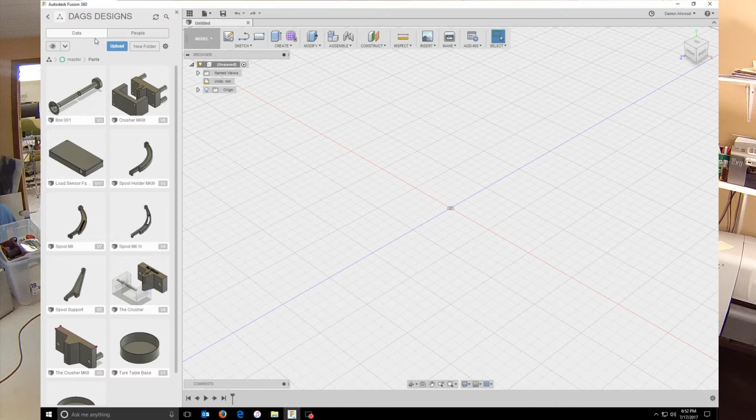These are just a bunch of different parts. So, this just gives you an idea of the different things I'm doing. Here's the C130 parts I've made so far, and I'm actually going to open up this.

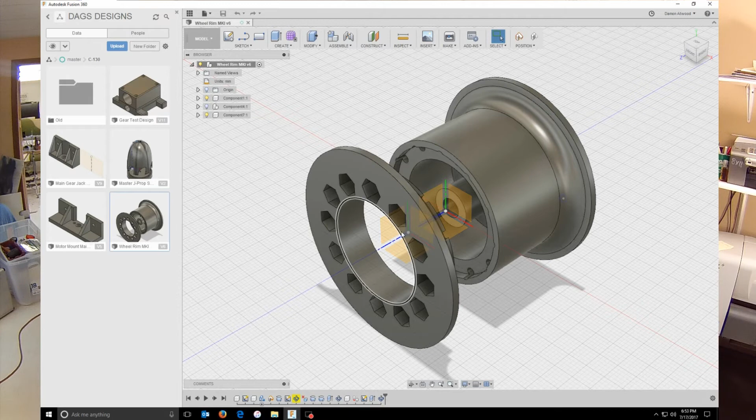And this is me playing around with a tire, the rim I'm going to try to make for the C130 using the carbon impregnated nylon. I think it's going to be strong enough, but the really nice thing about this program is just the editability, if that's a word, my ability to go in and edit things.

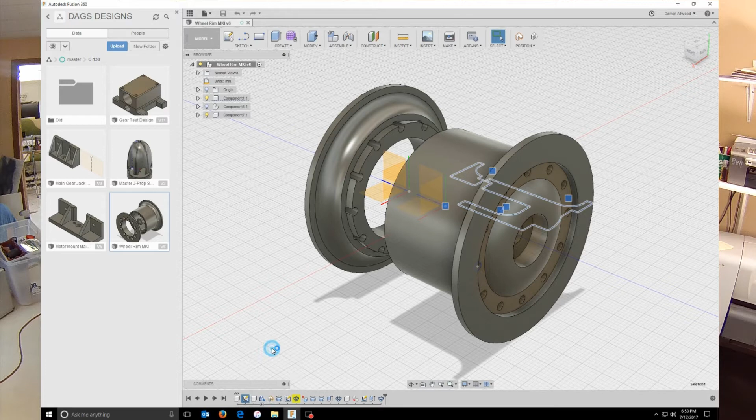Okay, now keep in mind I've only had this software for about 3 weeks, but if I wanted to go in right here and edit the profile of my rim, I can go in here, and right here is one side of it. This is the other half. This is like, let's say, the rear half, the front half of the rim, and here's where my brakes will go. So imagine this revolves and creates the entire rim. So that's the rim I've made.

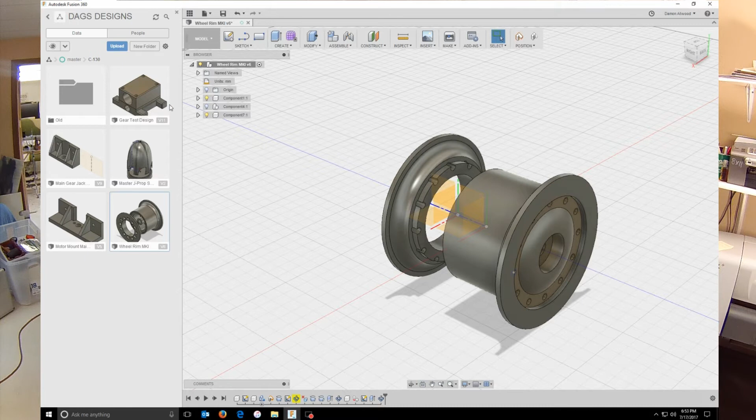This is the landing gear block that you all, I think, seen me playing around with on my Facebook. And this runs up and down. Actually, it's oriented more like, let's see, it's hard for me to do this. It's oriented like this, and it goes up and down on the tracks, and my landing gear strut runs through the middle here.

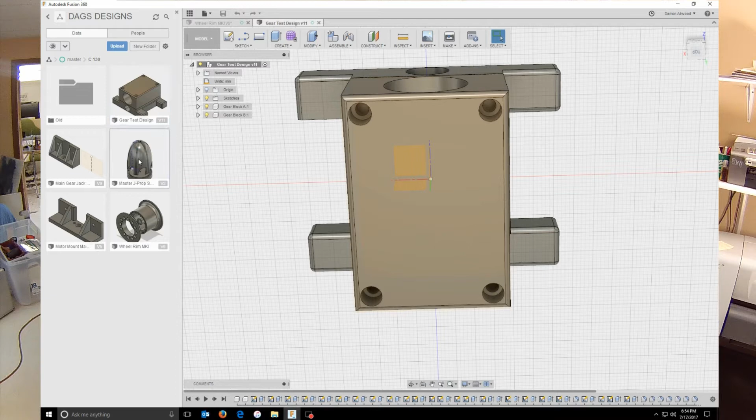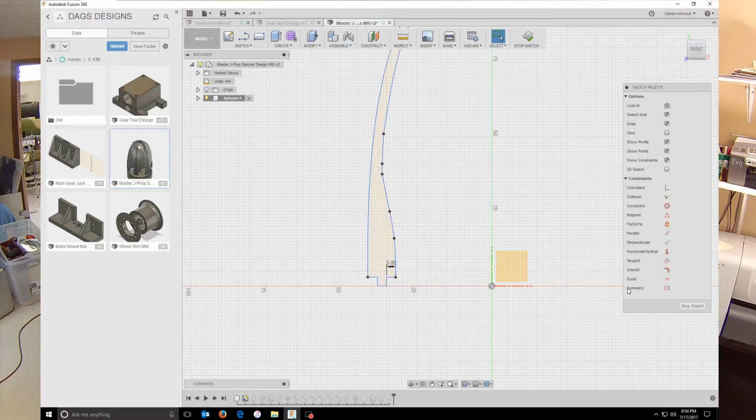I've also been very excited with the spinner I've designed in this, because I'm able to create thickness where I need it. So hang on a minute, let me show you here. Okay, so down here, as the spinner turns, centrifugal force wants to make it explode. So I had this little lip here, and then this was all going to be carbon fiber for my 3D printer. But I just wanted to make sure that this was a little bit thicker to give me a little bit more meat here. So if you look, you can see how I have that thickness right here.

But what's really cool is all of these are following the contour of the way it's going to go into my spinner backplate. So, I really, just so far have just had a fantastic time.

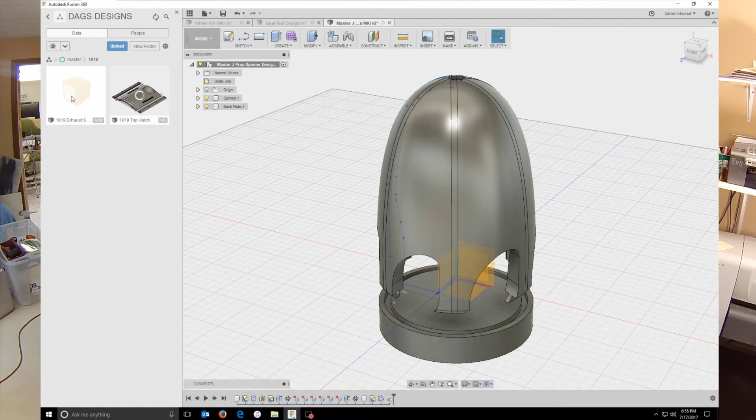Oh, okay, here's some parts I did for the 1919. I'm redesigning all new exhaust manifolds for the 1919. And I did all of these. I've already 3D printed one set of these pipes. The other pipe failed because after 10,000 feet of filament, I wore out a little spindle gear on my 3D printer after 1,000 hours of use, which I found out is a normal part to wear.

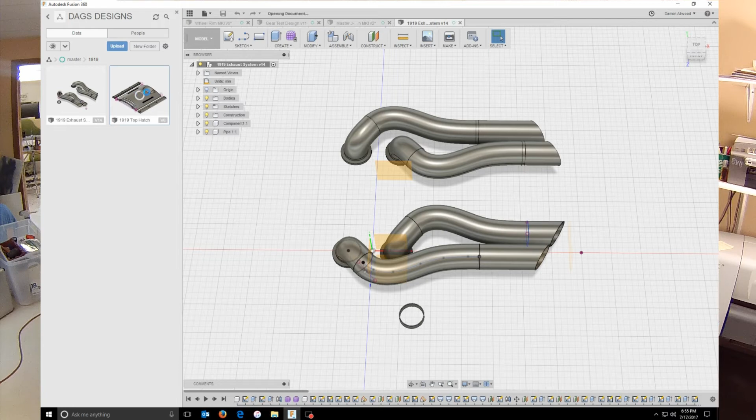And then this is the new hood for the Emmaselle that I created. And what's really nice about this is, like, creating this air scoop here, creating all of this. They say that's a pretty high level thing to do in this program, but I got to be honest, it was not hard to figure out. It just takes hours. And here's the tracks it's going to slide in.

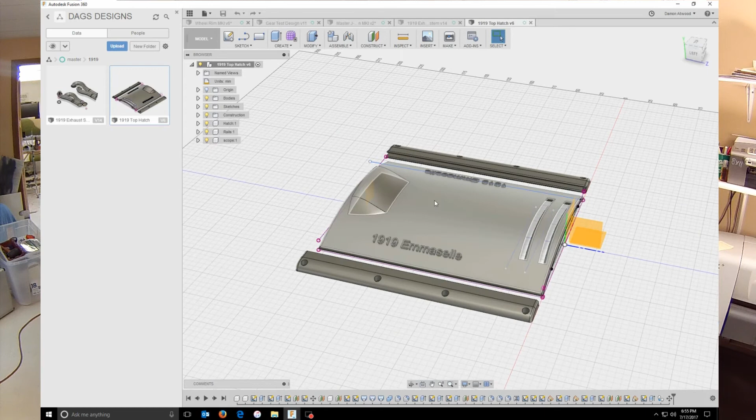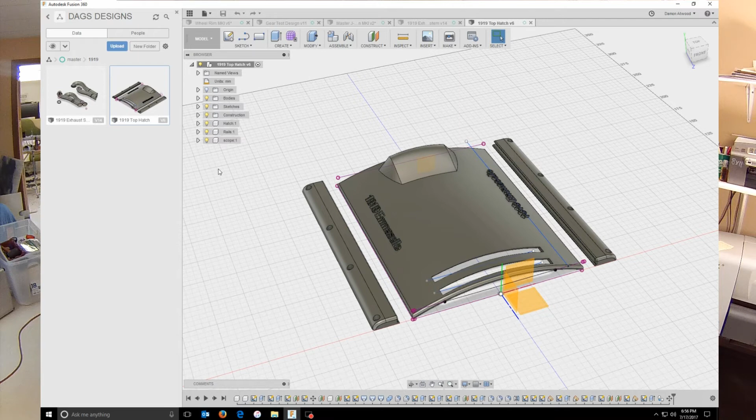So if anybody is scared of getting into Fusion 360, and I hope I didn't call it 3ds Max, because that's what I've been using for 12 years now. But the Fusion 360, if you've ever worked in any 3D program, I absolutely tell you, you've got to try it. You just got to absolutely try it.

So essentially, that's what I want to do in this video, was talk a little bit about my experience with the 3DXtech. I always want to call it a different name. And with my Fusion 360.

One last thing about the filaments. You just need to experiment with the temperatures. Okay, there's a lot out there where people say, oh, you've got to be at this temperature, you've got to be at this temperature. Unless you play with it and do some strength tests for your application. You know, when I printed out a lot of these different parts here, I tested them.

Like this part here, I actually did a PETG, because the only forces on this is the motor turning. So this doesn't have to be a heavy-duty structural part. And really, I have a boatload of the PETG I wanted to test, so I wanted to use it on the non-high-strength structural parts. This was printed with the carbon fiber infused nylon.

And as you can see, this little part is just strong. I mean, the 3D printed part that's that strong, I'm sure if I took 2 wrenches I could twist this apart, but by hand it's actually cutting into my hand and hurting. Same thing with this. This is carbon fiber infused nylon that I printed at 275C, which is 5C above what they recommend.

I'm going to be going to Warbirds over Owatonna, a big fly-in up north, about a 10-hour drive from here. Actually, about a 12-hour drive with all the pit stops and food and all that. But hopefully I'll make a video about Warbirds over Owatonna once I get back.